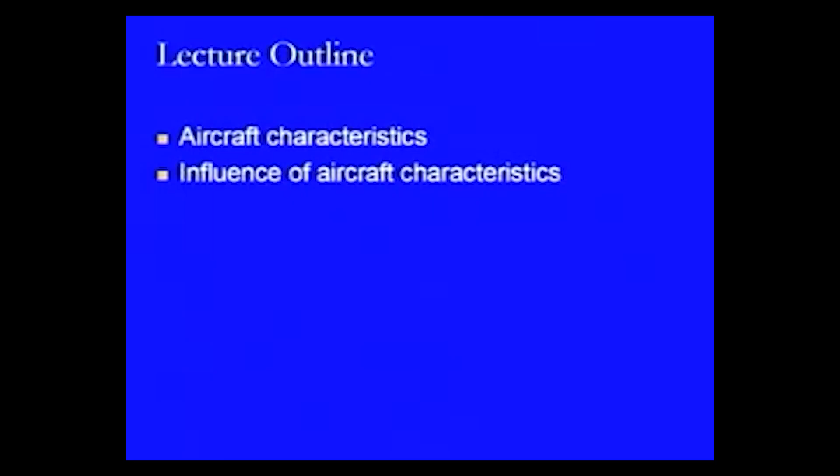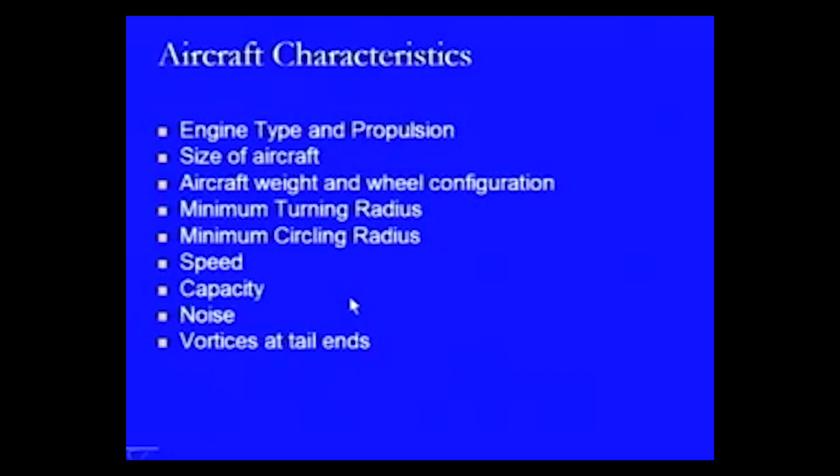So now we start with the main thing, the aircraft characteristics. Within these we will be looking at the various types of characteristics like engine type and propulsion, size of aircraft, aircraft weight, wheel configuration, minimum turning radius, minimum circling radius, speed, capacity, noise, vortices at tail ends, jet blast, and fuel spillage. These are the various characteristics which need to be considered as far as different design aspects of runways, terminals, taxiways, aprons, or maintenance units are concerned.

If we have an idea of what the characteristic is and how it creates an effect, then we can design those facilities. So in this lecture we are going to discuss at the end the different effects of these aircraft characteristics, and those effects are related to the design features which ultimately have to be designed in any airport.

Those design features we will be discussing in different lectures which come after this one. So we will see that whatever we study today has its implication in the coming design aspects. You may be a little careful to look at what characteristic is going to create an effect at what level or for what particular design.

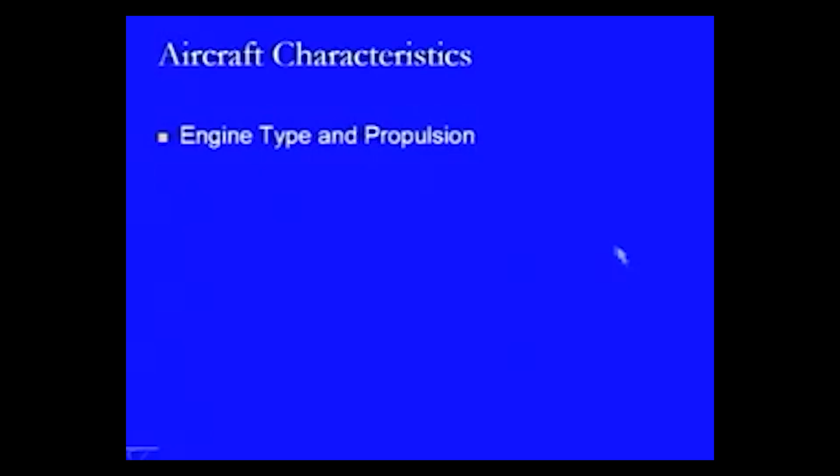In the aircraft characteristics, we will start with the first type, that is engine type and propulsion. In this, we have to look at what are the various types of engines available which can be used to provide the movement of the aircraft, and what type of movement can be provided - how fast or how slow, at what particular altitude, whether it is an atmospheric propulsion system or a transatmospheric propulsion system.

This propulsion may be through any type of engine. We have different types of engines which can be used for providing the propulsion we are interested in. There is a piston engine, a jet engine - where within the jet engine there are different types: turbojet, turbo propulsion, or ramjet - and then there is a rocket engine. All these types of engines, from their name itself, suggest how they can be used.

The piston engine, as can be seen as far as highways or railways are concerned, is the most conventional type of engine which has been used, where they are dependent on the movement of a piston. With the movement of the piston, the amount of torque and power is generated, and that torque and power is utilized by the vehicle for its movement. So that is more of a conventional type of engine which uses fuel, and that fuel is utilized to convert it into mechanical or electrical energy.

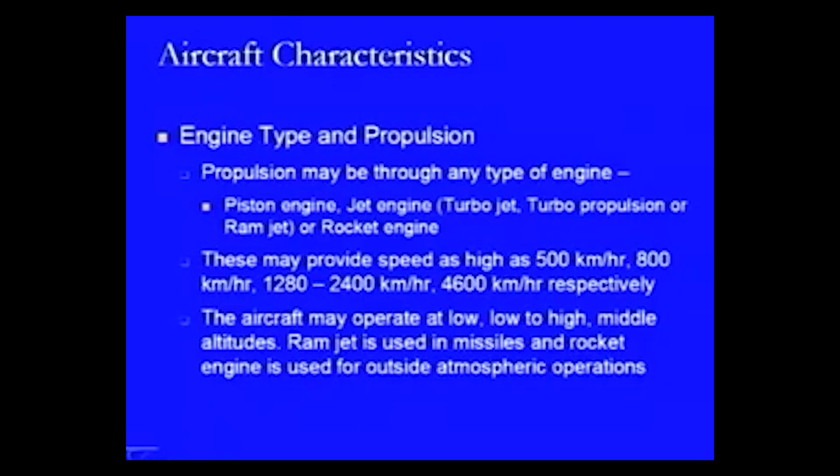They can be operated at low altitudes, low to high altitudes, or middle altitudes. Generally, piston engines can be operated at low altitudes, whereas turbojet or turboprop engines can vary between low to high altitudes. Ramjets operate around the middle altitudes. That is the way we use them.

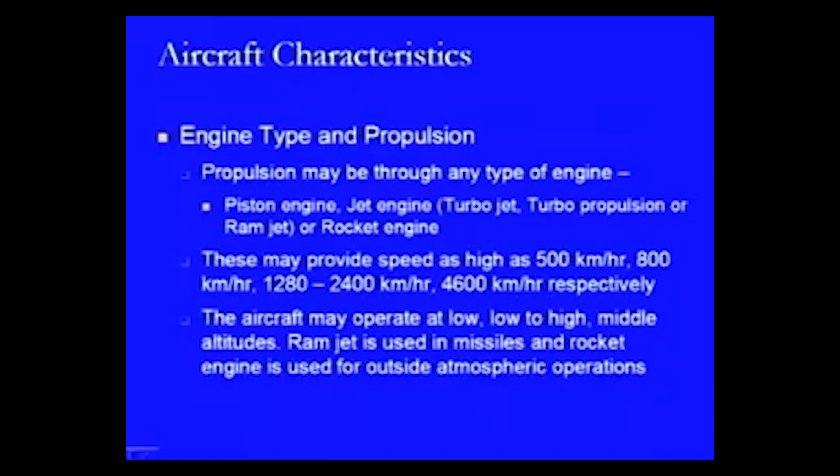Ramjets are also used in missiles, and rocket engines are used for outside atmospheric operations, because ramjets, as we see, have a higher speed and can be utilized at middle altitudes, where there are fewer chances of other operating systems being used, especially aircrafts which will be moving at low or high altitudes. Most of the time in new technology conditions, the high altitude conditions and middle altitude conditions can be used for the operation of missiles, and that is where ramjets are being used.

Then another thing is the size of the aircraft. This size of the aircraft is one of the important things to be looked at, in the sense that there are three components which create an effect in most cases of vehicles: its length, its height, and its width.

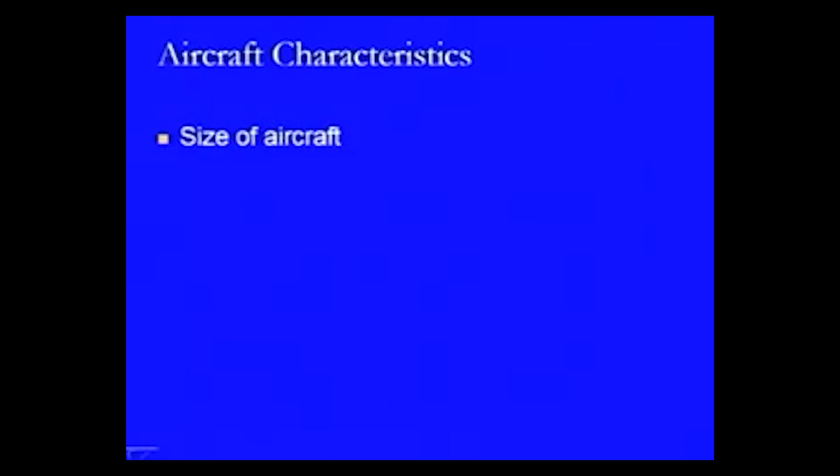Now, in the case of an aircraft, it is not just the single main body of the vehicle that we are talking about. We also have to look at the wings coming out of the main body, and that is where the overall wing span becomes important. As we have seen in the guidelines provided by ICAO or FAA, they speak not of the size of the main body of the aircraft, but of the wing span while classifying airports. That is the importance of the wings of the aircraft, and that is where the size of the aircraft at times has to be defined in terms of the wing span.

So we have to look at what defines the overall size of the aircraft, and this is defined using certain basic parameters like the fuselage length. The fuselage is the area which encompasses the fuel that is transported along the aircraft, used along the path. At the same time, it also encompasses the payload, that is the passengers and the freight, which will also be placed within the fuselage length. This is the length provided from the nose of the aircraft to the tail of the aircraft.

So, that is the overall length of the fuselage. Then another thing is the gear tread, which is the distance between the main gears being provided.

Height is usually taken at the tail, because in the case of the tail we provide a sort of wing in the vertical direction, and due to that the height increases beyond the topmost level of the fuselage at the nose. Therefore, the height of the aircraft is taken at the tail.

Then the width of the tail is to be examined and computed, because apart from the main fuselage body at the tail, there are two small wings provided at the back. So the overall width of the tail, which encompasses the fuselage plus the wings, has to be considered.

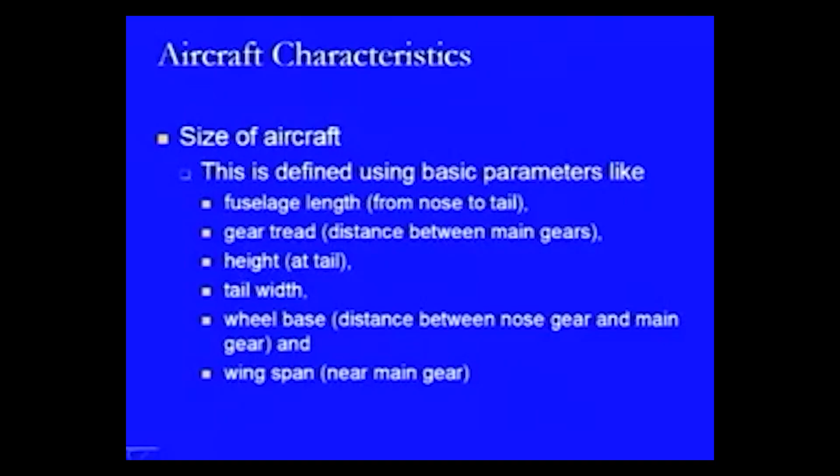The next important parameter defining the size of the aircraft is the wing span. This is calculated near the main gears, where the two wings on the sides connect with the fuselage, and if we go along these wings to the farthest point on one side to the farthest point on the other side, that is the wing span.

So this is how the size of an aircraft is defined using fuselage length, gear tread, height, tail width, wing span, and wheel base.

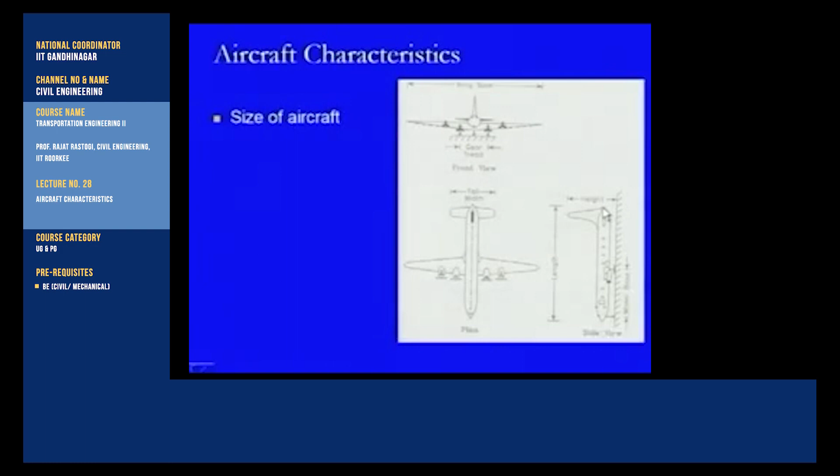At this location, just below, this body is the fuselage. So this is the nose and this is the tail, and at this location we have the wings. These wings come out on this side, as well as on the other side, and that is how the symmetrical design of the vehicle is achieved.

Now, where these wings connect with the fuselage body, whatever gears and wheels are provided there are the main gears, provided at the connectivity of the wing with the fuselage. This is for the nose one, and these are basically the wing gear systems.

Here they have shown below the four propulsion systems or engines employed on this aircraft. This is the location of one engine, this is another, and similarly there are two engines on this wing. The engines are not provided within the main body of the aircraft, they are located on the wings. Whatever number of engines have to be provided, they should be located symmetrically, and in case there is only a single engine, it has to be placed somewhere here, but generally it is not a single engine condition.

We have the double engine condition, and in that case on either of the wings one of the engines will be placed. Similarly, when it is a 4 engine condition, then we have 2 engines on one wing and 2 engines on the other wing. If it is 3, then there is one engine to be provided in the nose area. So, that is how we try to achieve the symmetrical conditions of the engine, so that the thrust or the torque or the power which is being generated by these engines is distributed evenly through all of the body

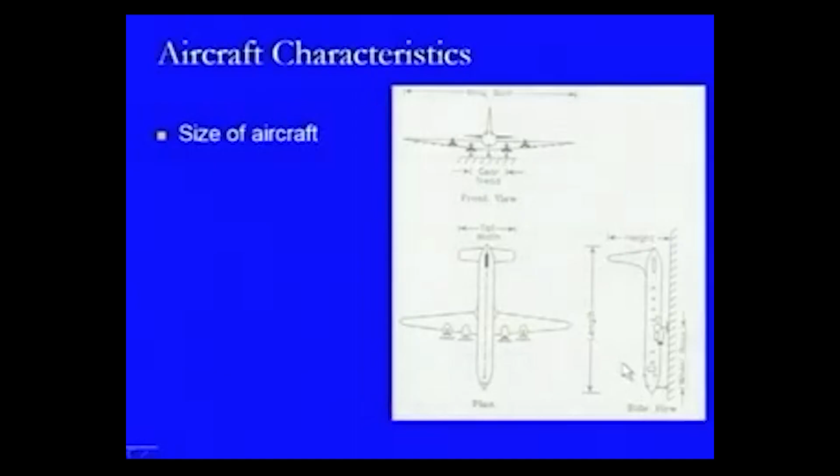So, these are the things, and along with this one, there is a wheel base. As we have discussed, the wheel base is the distance between the main gear which is located here and the nose gear which is located here. So, this distance is the wheel base, that is with respect to this wheel, the nose will be moving at a radius of this much. So, this will be taking a turn like this or like this. So, this is why it is termed as wheel base.

Now, we come to another important parameter of an aircraft, that is aircraft weight and wheel configuration. What is the total amount of weight of an aircraft? That is an important aspect. At the same time, how this load is going to be transferred to the pavement at the bottom is going to be defined by the wheel configuration and the number of wheels being provided. So, what number of wheels are provided and how they are provided is the wheel configuration.

So, in the case of the aircraft weight, there are different types of weights which we can discuss. They are defined as the maximum gross takeoff weight, the maximum structural landing weight, the operating empty weight, the payload and zero fuel weight. So, these are the 5 categories of the weights, and here they have been designated as A, B, C, D and E, so as to define the correlation between all these types of weights, which we will be looking at in a diagrammatic form.

But what basically are this maximum gross takeoff weight and others? In the case of the maximum gross takeoff weight, this is the total amount of weight which can be taken by an aircraft at the time when it is taking off from the runway strip to the air. So, at that point of time, whatever is the weight of an aircraft, that weight is termed as takeoff weight.

Payload means it is a load which is being paid for and from where the revenues have been generated. So, that is the payload; it includes the passengers and it includes the freight. Then there is a zero fuel weight. That zero fuel weight is a condition when the aircraft is reaching the destination and the fuel is coming to the zero level. So, at that point of time, whatever the weight is, that is the zero fuel condition weight.

And then operating empty weight means we are operating without taking any other load, that is, the payload is not there; that is the empty operating weight. And we will look at how they change. And another one is this maximum structural landing weight.

As we have seen in the case of the takeoff weight, it incorporates all the types of weights which can be there, like the weight of the aircraft, weight of the payload, weight of the fuel, weight of the accessories being provided for the passengers or for the freight; everything is included. Whereas when we talk about the landing weight, when we are landing there will be passengers, there will be freight, there will be the weight of the aircraft itself, but what is deducted from the takeoff weight is the weight of the fuel consumed during the journey. So, whatever fuel is consumed during the journey, that much weight will get reduced, and that will become the maximum structural landing weight.

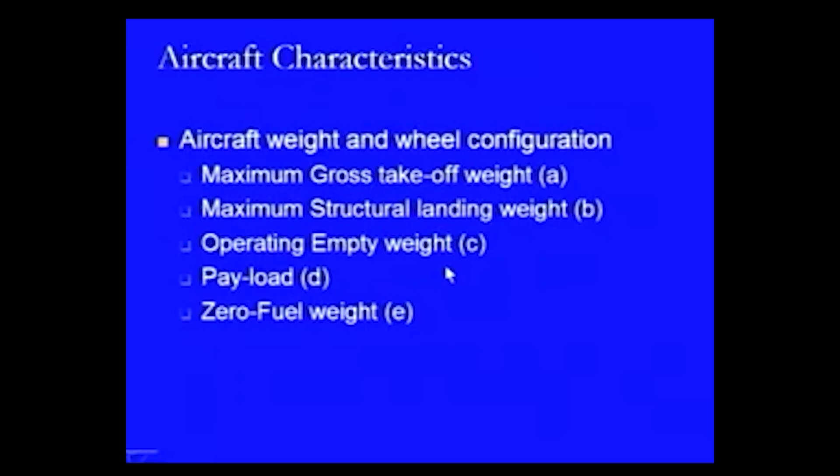Now, the word maximum comes depending on the size of the aircraft which will be using that airport. So, on that basis, whatever is the biggest aircraft which will be using the airport, we will take the gross takeoff weight and the structural landing weight with respect to that aircraft. That is an important aspect, because some of the supporting system designs are dependent on these types of weights.

Here in this diagram, we are trying to show the relationship of all these components. As we have discussed, we have A, B, C, D and E. If we look at C, D and E, C is operating empty weight, D is payload and E is zero fuel weight. So, here this C is the empty operating weight. This empty operating weight varies between 44% and 66% of the overall weight of an aircraft. So, it comes up to this point. If we assume this as a 100% scale, then it will be up to this level.

Then we have this D, which is the payload. This payload varies between 16 and 24% in a normal aircraft, where we are talking about the passengers and the freight. Then we have this zero fuel weight, and this zero fuel weight varies between 6% and 40% depending on the size of the aircraft and the distance for which the aircraft is making a flight. Then there is also some reserve fuel, which is a very small value of 4 to 6%. That is what is shown here at this level. So, these are the different components of the weights.

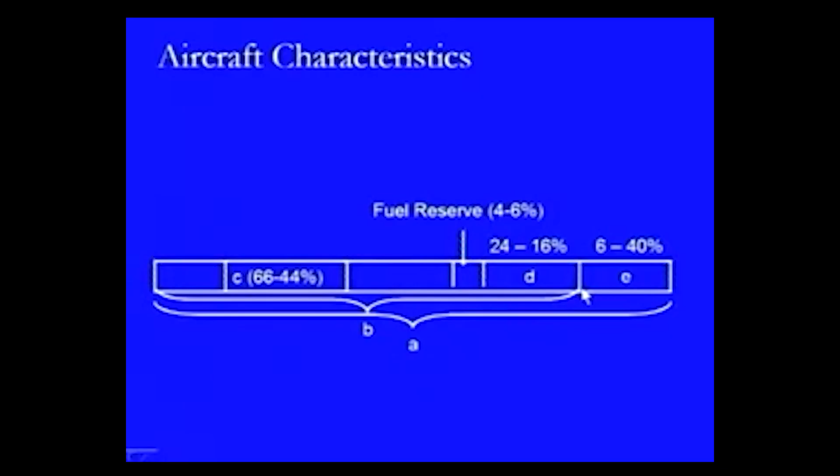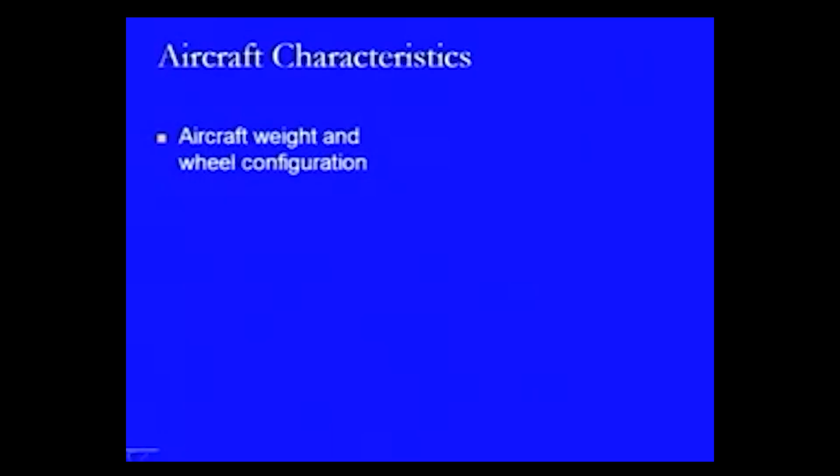And if we remove the weight of the fuel consumed during the journey, then what we are left with is B, and this B is nothing but the structural landing weight with which the aircraft will be landing on any airport. So, these are the weight characteristics of the aircraft, and now we will look at the wheel configurations. Wheel configurations, as I have told, define how the loads are going to be transferred to the bottom supporting system.

The more the wheels, the less is going to be the stress at a certain location, and that is where we require a lesser thickness of the material at the bottom, or we can have a material which can take a lesser amount of loads. So, that is where the wheel configuration becomes important, and there are different types of wheel configurations available. It all depends upon the size of the aircraft, and on the basis of that size we can provide the various types of wheel configurations.

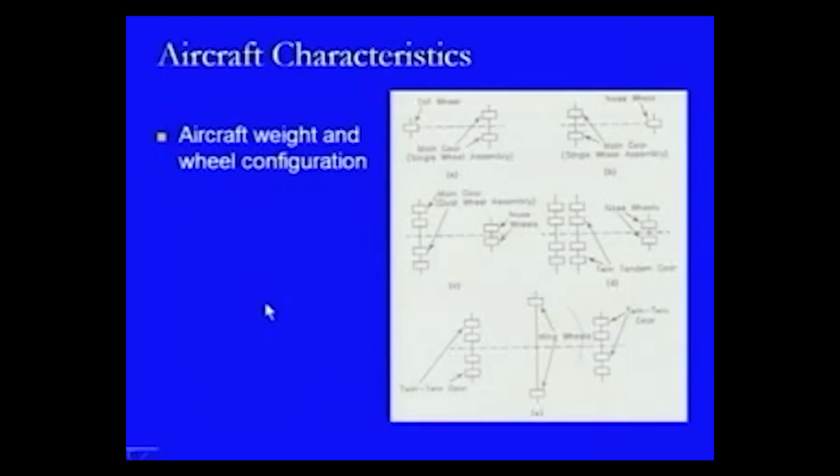And then there is a twin gear system, where we are providing the twin gears at the back at the wing wheels, and again we have the gears provided in the nose area. So, in the nose as well as in the tail area we have wheels, and at the main gear location also we have wheels. So, these are the different configurations of the wheels which can be there.

Now, we come to another important characteristic, that is the minimum turning radius. This minimum turning radius is defined as follows: while taking a turn, the nose gear is steered. As we have seen in the case of road vehicles, if we steer the vehicle, the front wheel is steered, and the back wheel is generally the powered wheel, from where the power comes to the vehicle. The same condition is here.

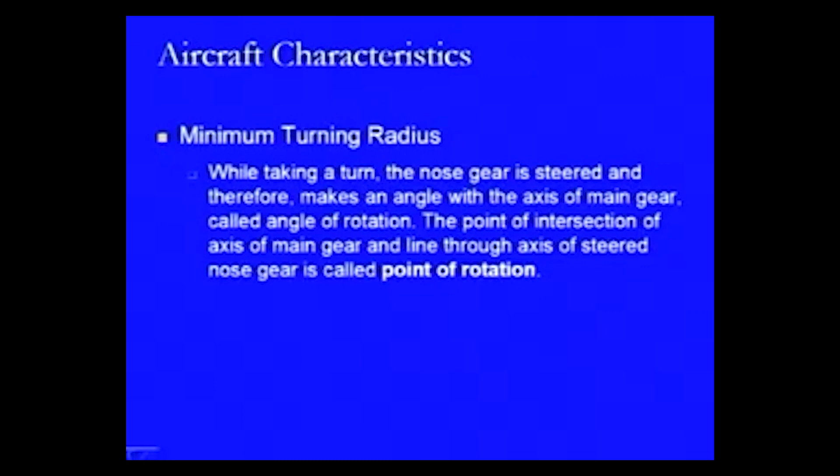Here the nose gear is steered while taking a turn, and therefore it makes an angle with the axis of the main gear, because the main gears are provided at the wing location. So, as soon as it is steering, there will be an angle with respect to the axis of the main gear, and this angle is known as the angle of rotation. And the point of intersection of the axis of the main gear and the line through the axis of the steered nose gear is called the point of rotation. That is the point with respect to which the whole aircraft will take a turn.

That point of rotation is identified on the basis of the extension of the axis of the main gear as well as of the steered nose gear. Wherever these two extended axes intersect, that point is termed the point of rotation. The maximum angle of rotation varies between 50° and 60°, and the line joining the center of rotation and the tip of the farthest wing of the aircraft is known as the minimum turning radius. This is the minimum value by which an aircraft can take a turn, and any other radius by which the aircraft takes a turn will be more than this one.

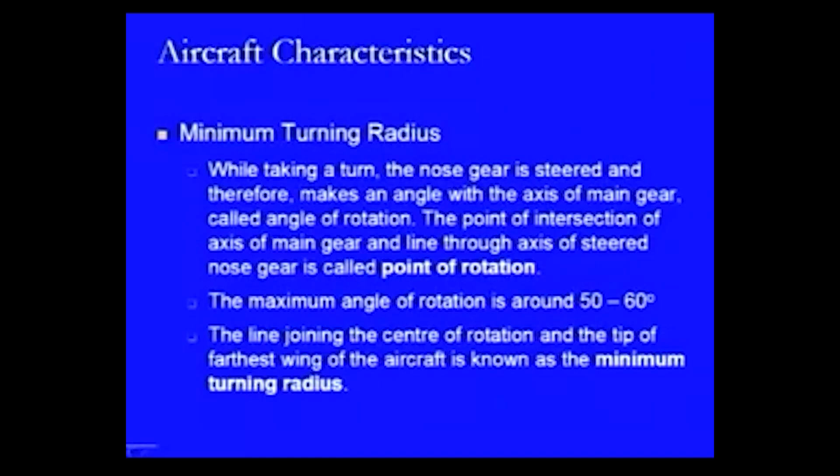So, what we have to do is, once we find the point of rotation, this point of rotation is joined with the farthest point on the wing on either side, and whichever is the maximum, that maximum value is going to be the minimum turning radius.

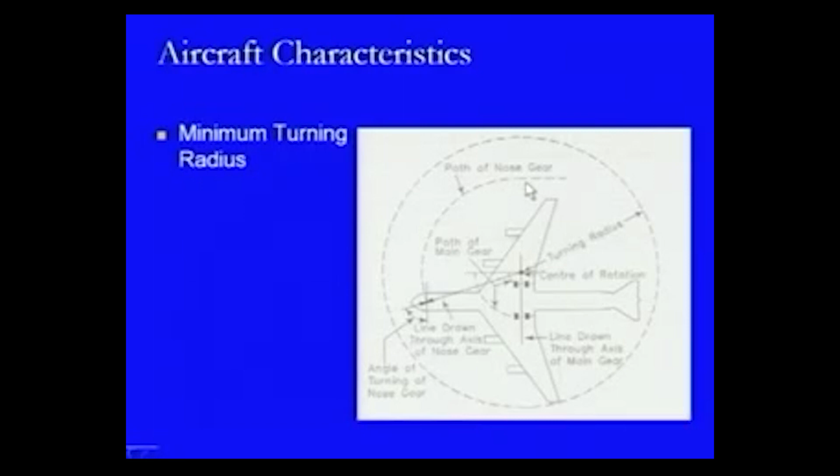So, it will be taking a turn with respect to this point and will move at this particular radius like this. So, the turning radius is equivalent to this distance. If I join this dot with this last point, that will be the turning radius. So, this is the minimum turning radius with which the aircraft will be taking a turn on any airport while it is moving on the ground. That is the ground turning radius which is to be provided, and if the aircraft is big, it requires a bigger turning radius. If the aircraft is small, it requires a smaller turning radius.

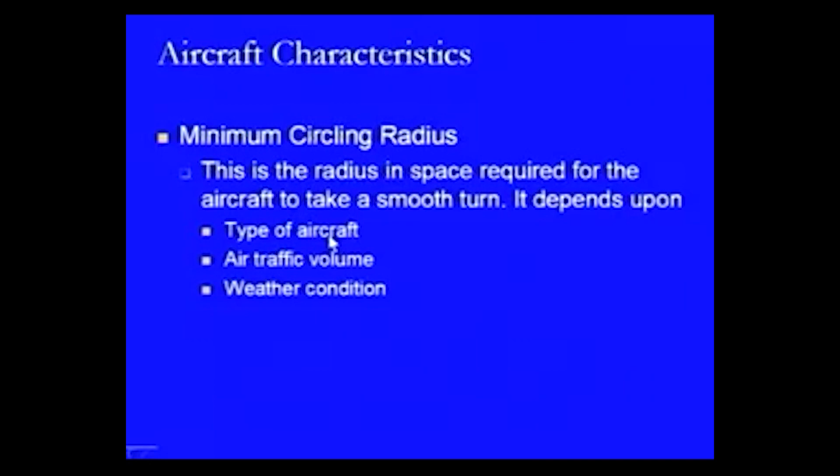In the same form, we look at another characteristic of an aircraft, that is minimum circling radius. This minimum circling radius is related to the movement of the aircraft within the air, and this is the radius in space which is required for an aircraft to take a smooth turn. Therefore, it is dependent on aspects like the type of the aircraft, meaning what type of power propulsion system is available to the aircraft, the size of the aircraft, the air traffic volume, and the weather conditions. That is going to define this minimum circling radius.

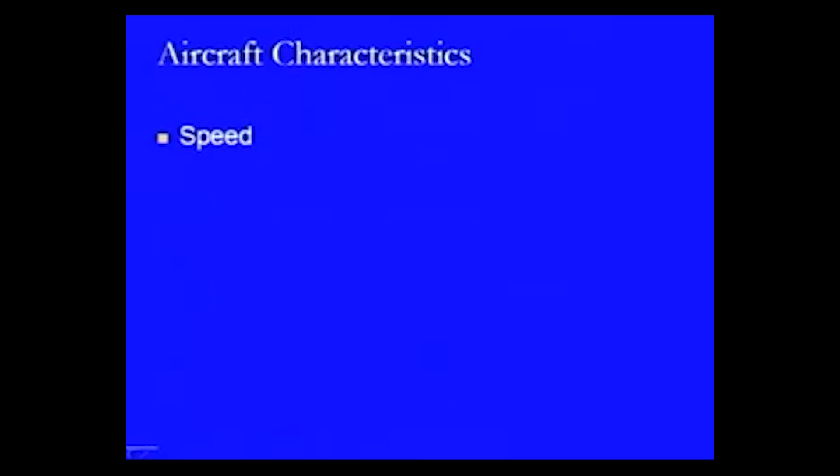And this minimum circling radius is the total radius which is provided at the top of the airport in which the aircraft will be circling if it is not being allowed to land. Sometimes you must have seen aircraft moving at the top of the airport; that is the circling radius, and its significance we will be looking at later.

Now, in the case of the speed, there are different ways the speed of an aircraft can be defined. It is like air speed, where the air speed is the speed of the aircraft relative to the medium, and in most cases the medium remains air, so far as we are talking about atmospheric movements. Within this there is an indicated speed. This indicated speed is the speed which is indicated by the instruments on board, and generally this is around 2% lower than the true speed of the aircraft.

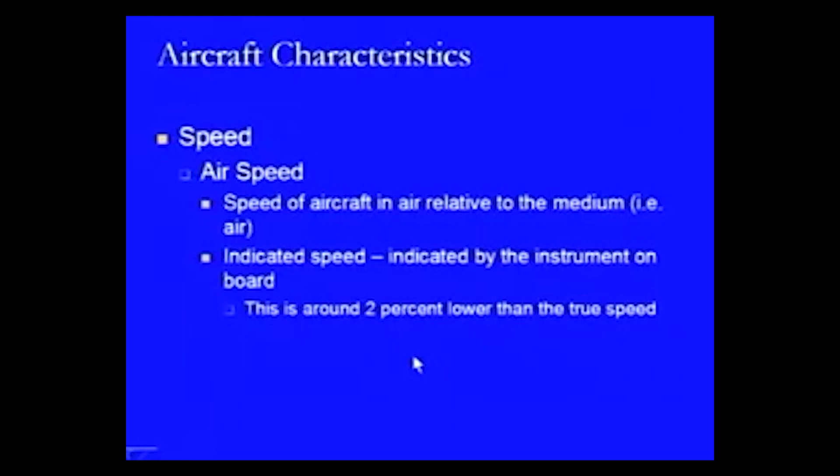The reason is that it is a relative condition, and we have to look at the effect or resistance of the air, and the effect of that is to reduce it by something like 2%. Further, in this diagram, we have the overall speed: there is a wind speed working in this direction, and the aircraft is moving in this direction. This is the medium, that is air, and the velocity of this aircraft is in this direction.

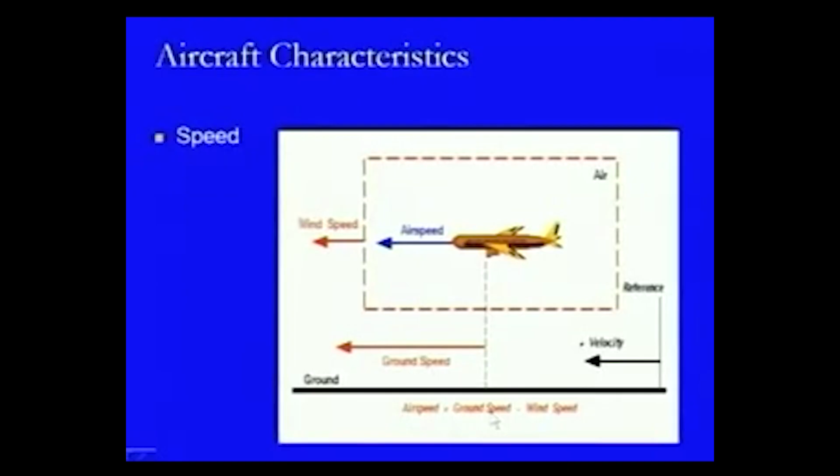So, if we are looking at the relationship between the air speed, that is the speed with which this aircraft is moving in the air, the speed termed as the ground speed, that is the speed we get while looking at this aircraft from the ground, and the correlation with the wind speed, that is the speed at which the wind is blowing, then air speed is equal to ground speed minus wind speed. So, that is how we can compute the value of the air speed, or that is the correlation. Whatever two values are given to us, we can compute the third one.

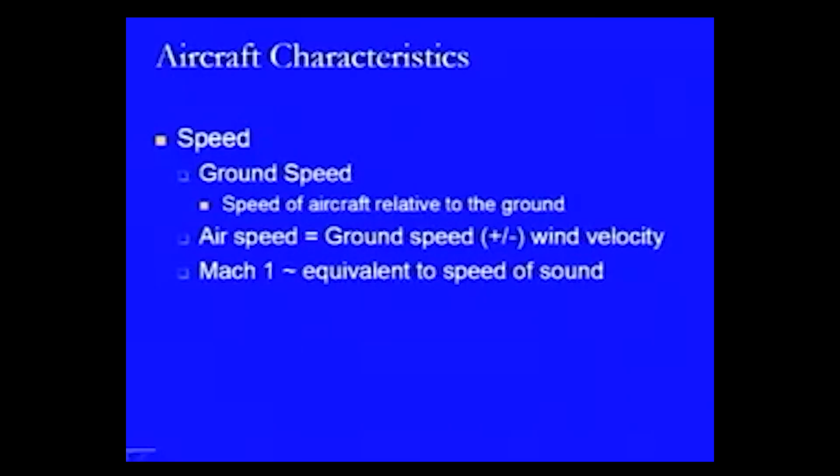So, in this case the ground speed is the speed of the aircraft relative to the ground, and the relationship we have already seen is that air speed is ground speed plus or minus wind velocity, and Mach 1 is termed as equivalent to the speed of sound. So, that is how the speeds of aircraft are termed. Generally they are termed as less than Mach 1 or more than Mach 1, and on that basis we have the subsonic and the supersonic aircraft.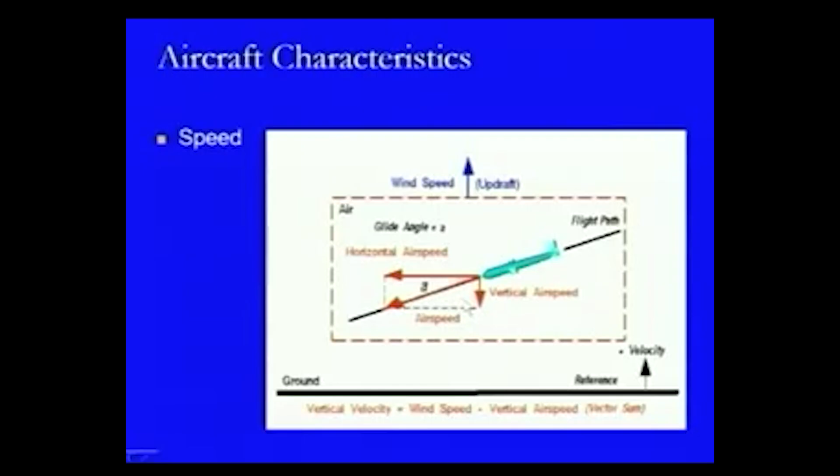And if we resolve it into two components, there will be a horizontal airspeed component and a vertical airspeed component. Okay. And in this case, if there is an updraft in the upward direction, then this vertical velocity will be equivalent to the wind speed plus vertical air speed, that is the vector sum of these values. That is another way of defining the speed in this case.

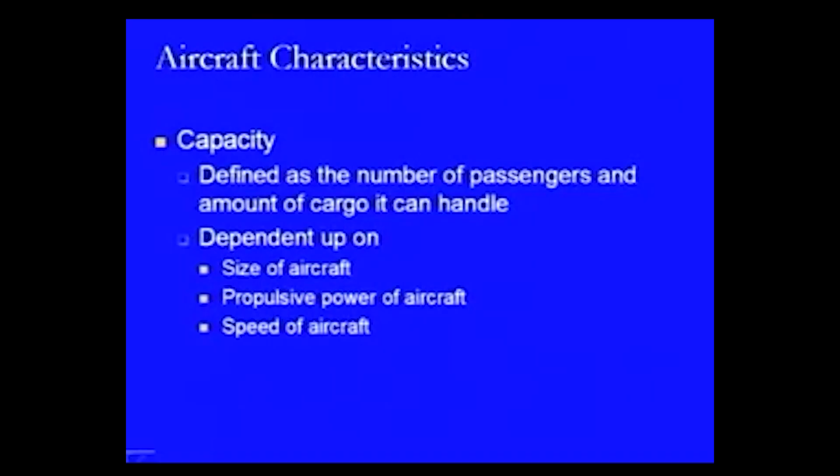Then the next characteristic is the capacity of the aircraft, and this capacity is defined in terms of the number of passengers or the total amount of freight which can be transported using that aircraft. Therefore, it is governed by certain factors, and the factors are obviously the size of the aircraft, the propulsive power available to the aircraft, and the speed of the aircraft with which things can be transported.

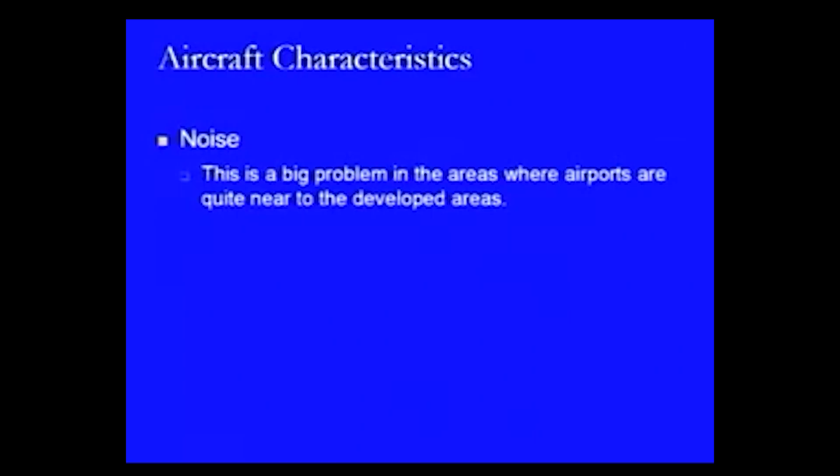Another characteristic is noise. This is one of the big problems in areas where airports are located very near to developed areas. The major sources of noise are engine noise, the machinery noise which is more prominent at the time of landing, and the primary jet noise which is more prominent at the time of takeoff. So, these are the different components of the noise. This engine noise will always remain, and the disturbances are more severe during takeoff than during landing, and that is because of the jet.

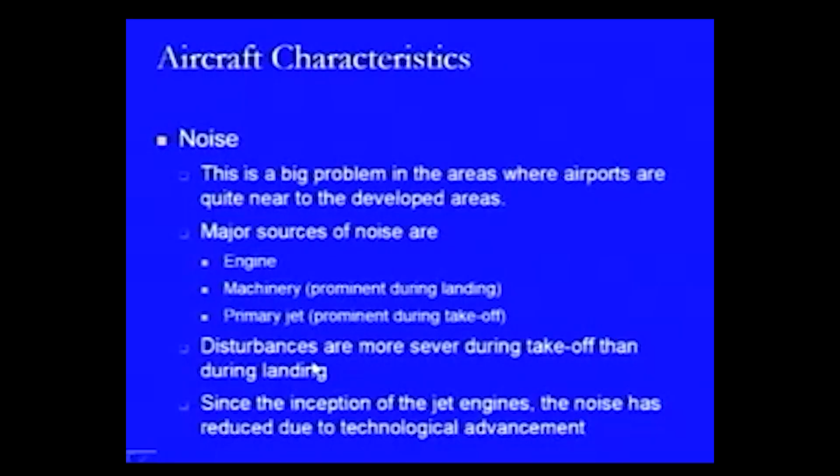Since the inception of jet engines, the noise has reduced due to technological advancement. Initially, jet noise was very heavy, and it was a deterrent to using jet engines in areas where airports are near developed areas. But now with technological advancements, this noise has been controlled to a large extent.

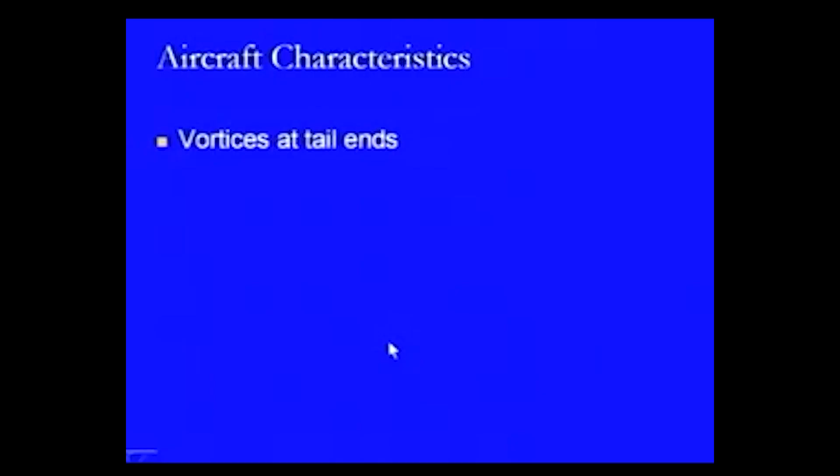Then another important aspect is the vortices which get formed at the tail while the aircraft is moving in the air at a very high speed, and these vortices have the tendency to break the tail if they are very heavy and if eddies are formed at the back. These are made of two counter-rotating cylindrical masses which extend along the flight path. So, if the measure of these counter-rotating cylindrical masses becomes large, they may become a hazardous condition for the tail end also.

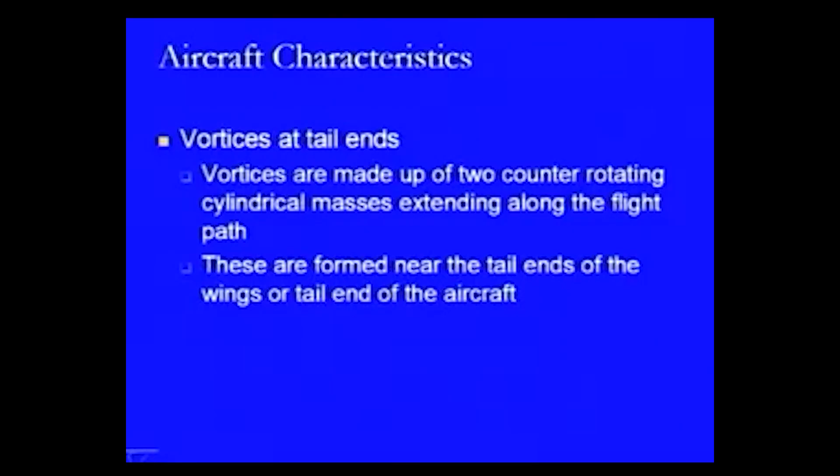And these are formed near the tail ends of the wings as well as near the tail end of the aircraft, where there is a detachment of the movement of the air with respect to the body of the aircraft.

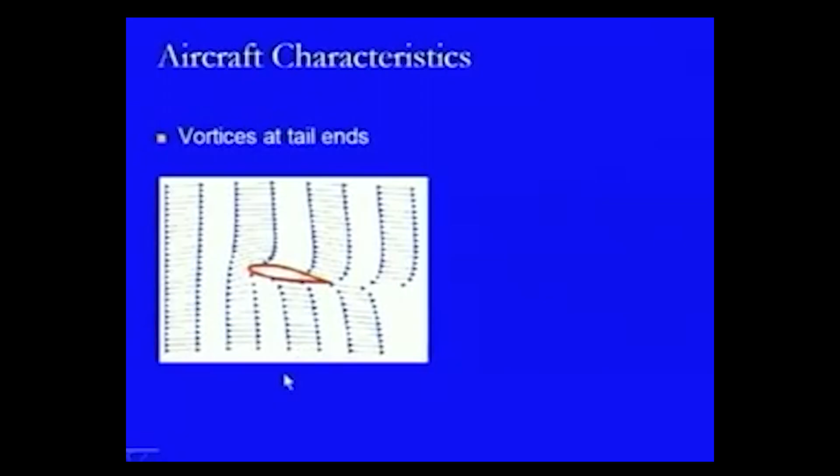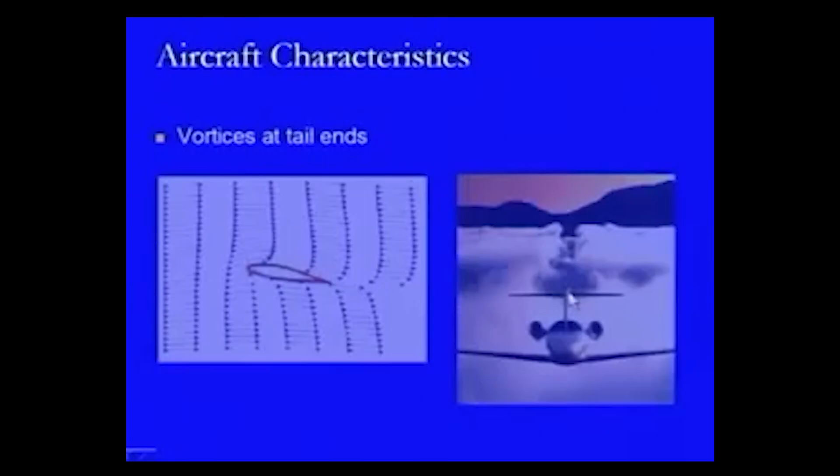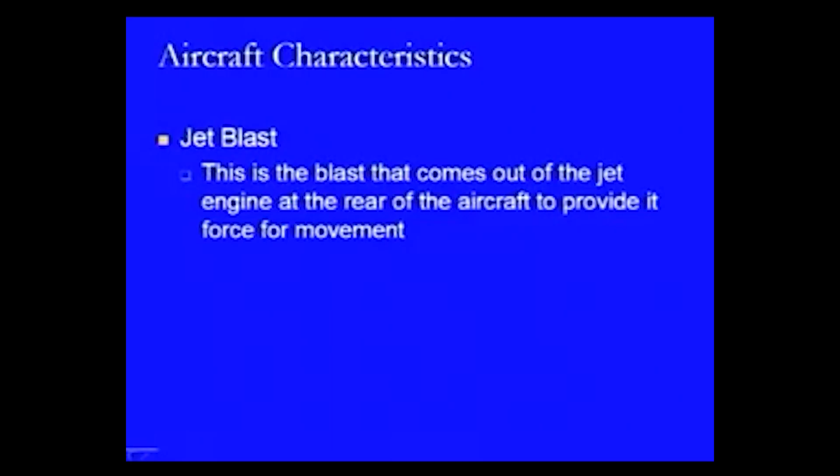Then the next aspect, in the case of aircrafts where jet blast is used, this is the blast that comes out of the jet engine at the rear of the aircraft, and it provides the force required for the movement of the aircraft. But if we consider the case where the aircraft is standing and the jet blast is coming from the rear, it is so hot that it creates a severe condition for the things on which it falls.

So the severity depends on two things: one is the height of the tailpipe from the ground, and the other is the angle of the tailpipe through which this jet blast comes out at the tail end. If it is in the upward direction, it will go up. If it is in the downward direction, it will create an effect on the pavement on which the aircraft is standing, and therefore there is a need to erect blast fences which can control the damage to the building or the pavement.

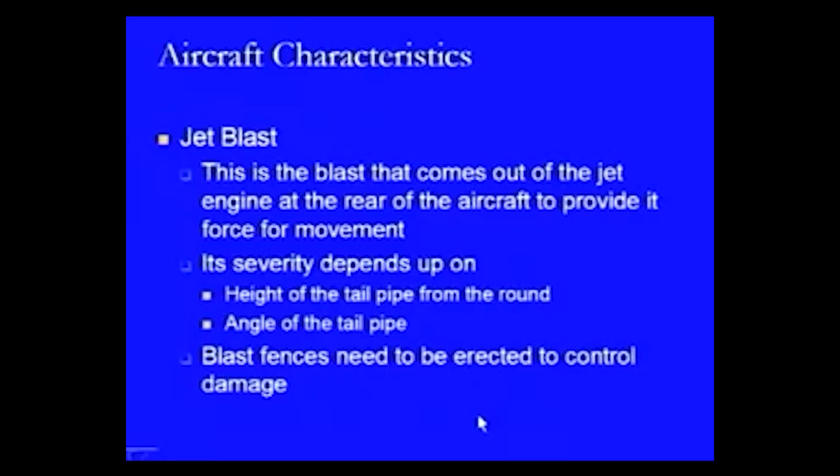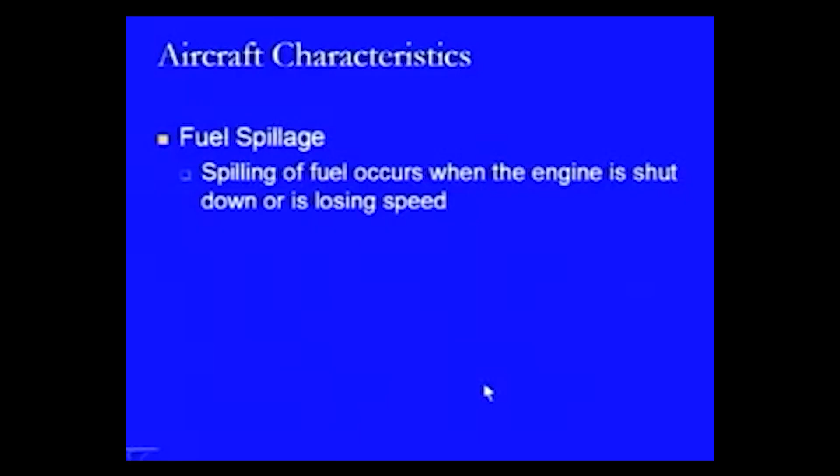Then the next one is fuel spillage. Fuel spillage is the fuel which gets spilled over the pavement from the engine or from the locations where it is being filled into the aircraft, and this creates an effect in terms of causing an effect on the speed of the aircraft while it is moving on the runways, taxiways, or apron areas.

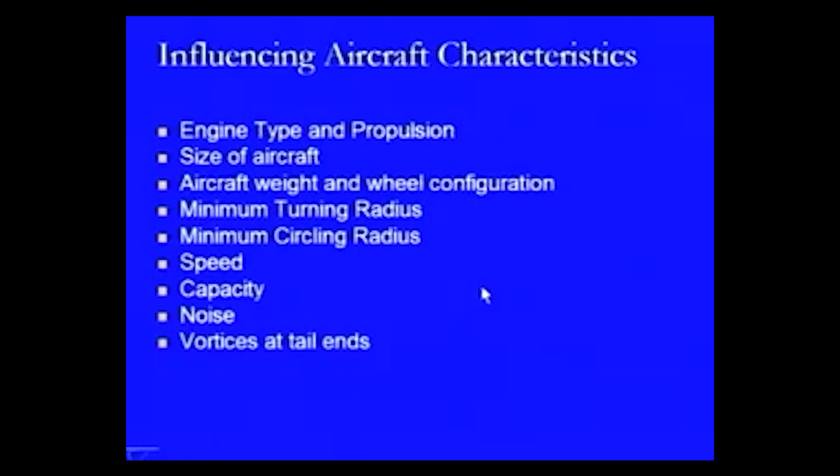Now we look at some of the influencing characteristics of aircrafts and the effect of these characteristics on the design parameters, like in the case of the very first characteristic, engine type and propulsion, or the size of the aircraft, or whatever we have discussed so far: aircraft weight and wheel configuration, minimum turning radius, minimum circling radius, speed, capacity, noise, vortices, jet blast, and fuel spillage. So we will take these up one by one.

Engine type and propulsion decides the size of the aircraft, as we discussed previously, and the speed with which the aircraft can move. Obviously this affects the length of the runway, because the more speed or more propulsion there is, the longer the runway strip required for its movement, so as to take off or to land and stop.

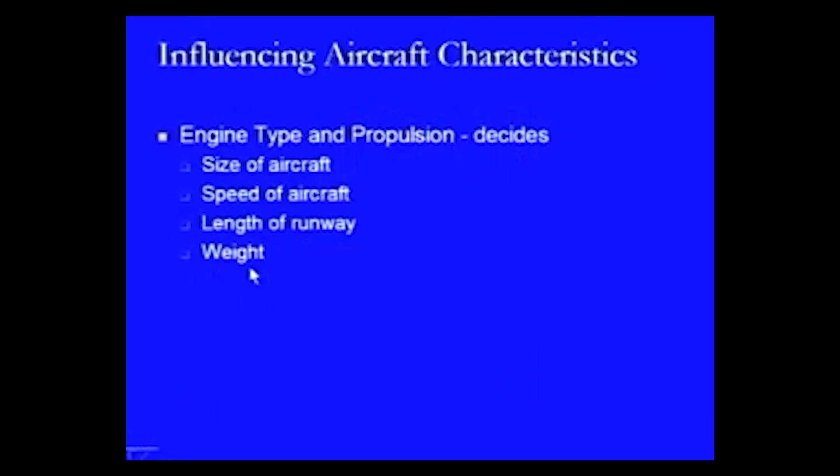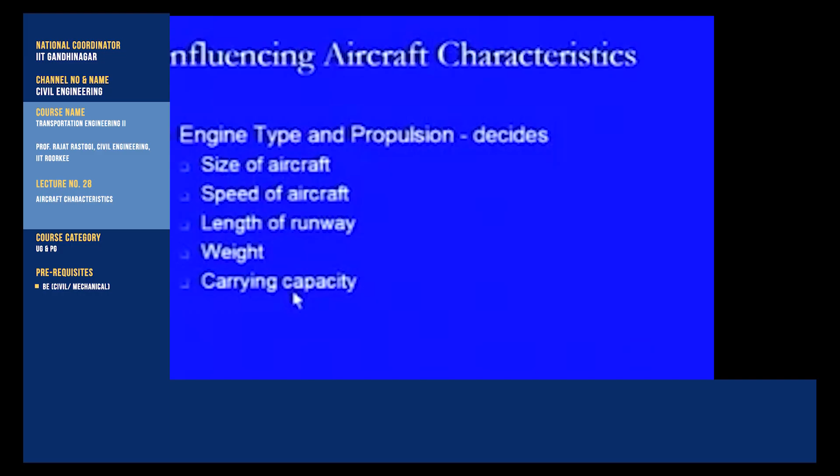It also increases the weight of the aircraft if a bigger propulsion system or a heavier engine is provided. It also creates an effect on the carrying capacity of the aircraft, since it affects the size of the aircraft. We are talking here in terms of load-taking capacity: the aircraft provided with a bigger engine or better propulsion system can take a higher load.

Noise nuisance depends on the type of propulsion system. If the propulsion system provides very heavy power, the circling radius will also increase, meaning we require a bigger area for the movement of the aircraft. At the same time, the range—the distance up to which the aircraft can move without refueling—will also be bigger if a bigger or better engine type has been used for the propulsion system.

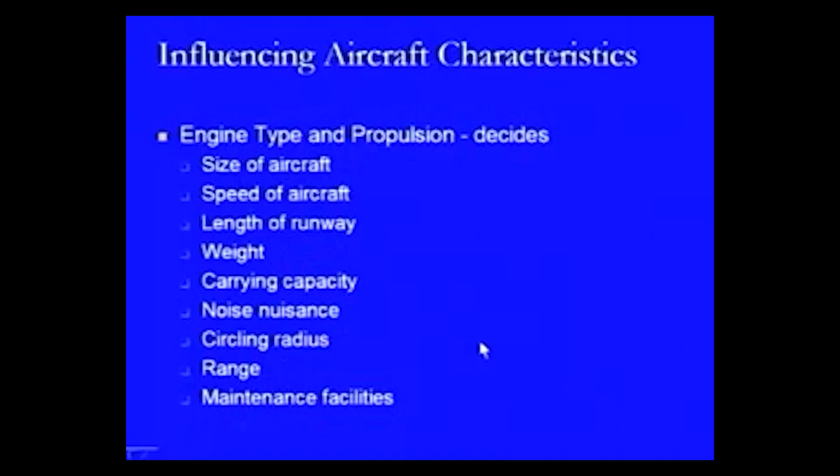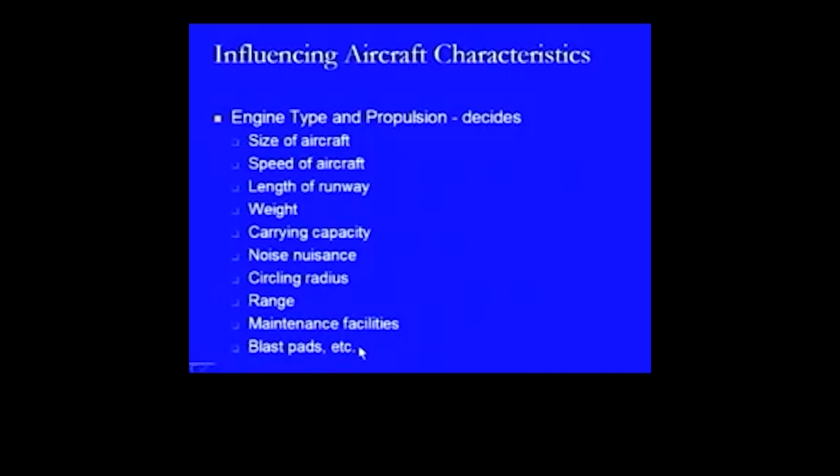Then maintenance facilities are dependent on the type of engine. That is another type of facility which is to be checked with respect to the type of aircraft coming with different types of engines. Blast pads, etc., are required in cases where jet propulsion has been used.

The size of the aircraft creates an effect in terms of load carrying capacity and facilities like the size of the apron or terminal area. Depending on whether the aircraft carries 10, 20, 100, 500 or 800 passengers, the facilities needed also increase in size. If there is a bigger aircraft, a bigger apron is to be provided. Apron means the location where the aircraft is standing, and similarly the terminal area size will also increase.

If the size of the aircraft increases, the wing span will increase, and this affects the design of the taxiway width, the separation to be provided between traffic lanes, and the size of the gates. The gates are the locations from where passengers board the aircraft, and the size of the gate is defined based on the size of the aircraft.

Similarly, the size of the apron where the aircraft is standing, and the width of the hangar gate, the location where the aircraft can be parked or maintained, known as the hangar, is governed by the size of the aircraft. Similarly, the length affects the widening of the taxiway on curves, the size of the apron, hangars, and aircraft capacity. These affect the length and width of the exit taxiway, since the width needed while taking a turn is governed by the length of the aircraft. Height also creates an effect in terms of facilities like hangars.

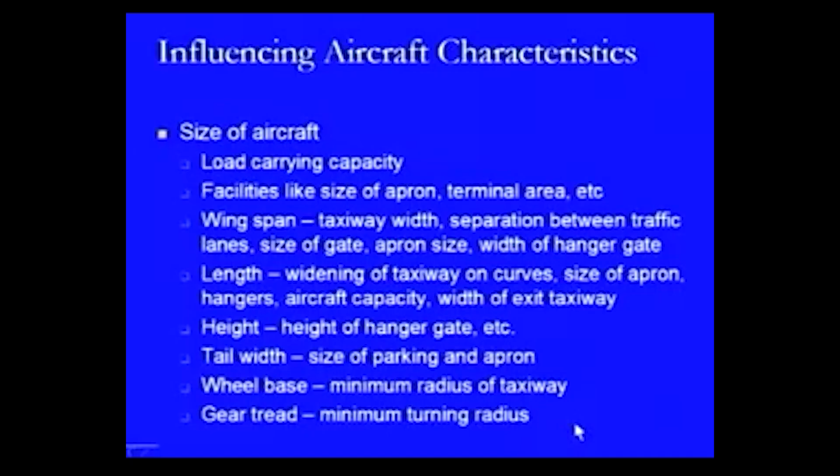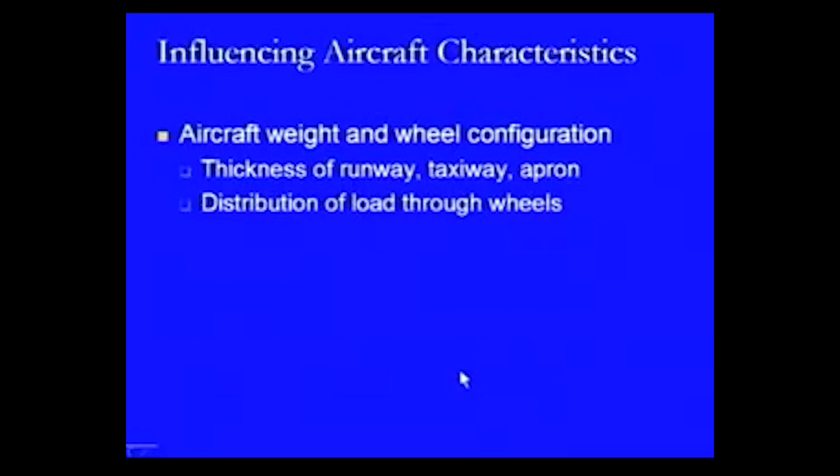The weight of the aircraft and the wheel configuration affect the thickness of the runway, taxiway, or apron pavement to be provided, what should be the thickness of that pavement, and the distribution of loads through the wheels, which we already discussed when we discussed the configuration.

The generation of revenue is also affected, because if we can carry more load, more revenue is generated. Turning is also governed by the aircraft weight; if it is heavier, turning may be a little difficult at sharper conditions. Stability is also governed by aircraft weight, and this stability may be in terms of the support system provided, or in terms of the wheel configurations needed depending on the amount of weight the aircraft carries. So two types of stability concerns can be there.

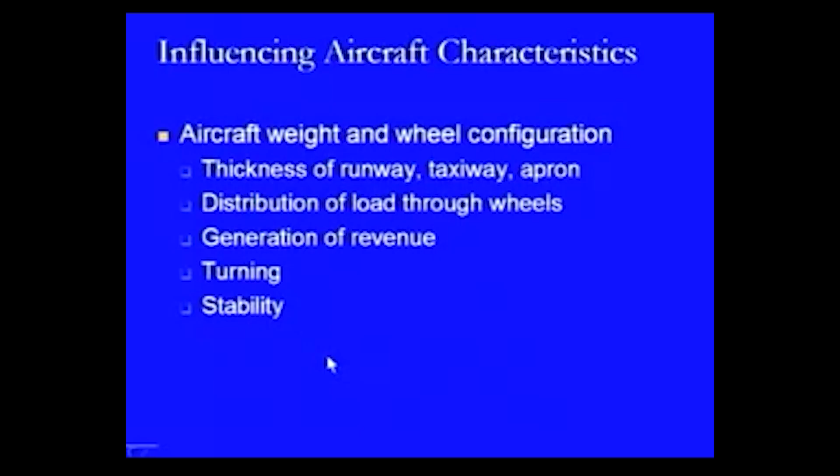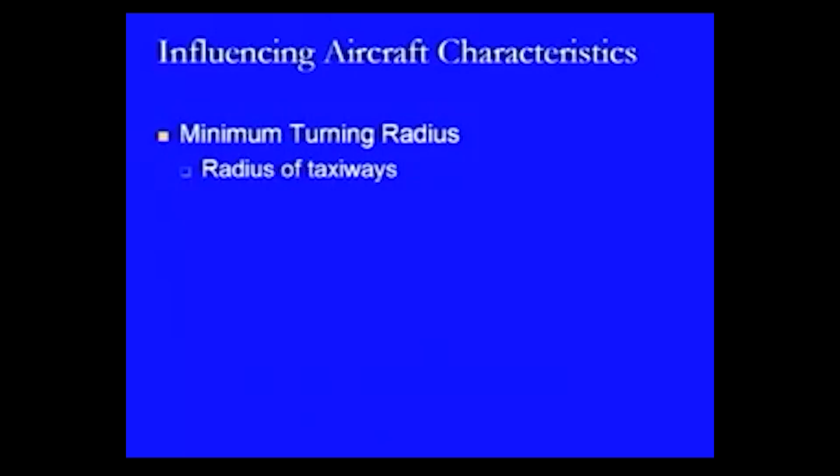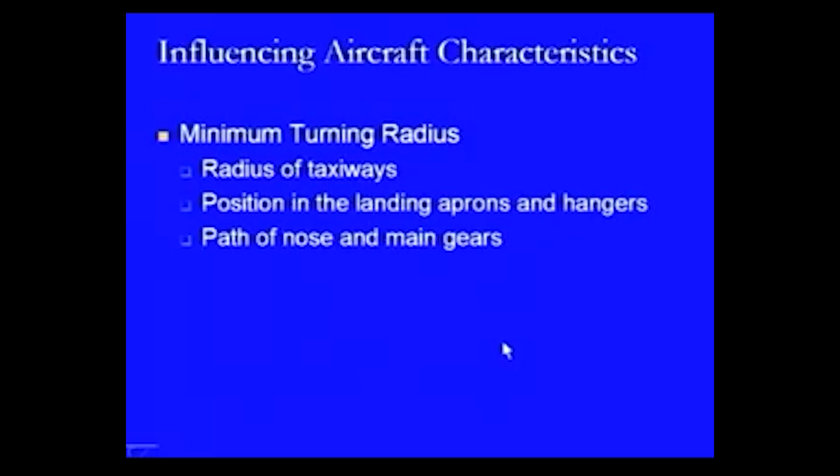Now the next aircraft characteristic is the minimum turning radius, and it has its effect on the radius of the taxiway. The taxiway is the connecting pavement provided between the runways and the aprons. The position of landing aprons and hangars is also governed by the turning radius, in terms of how they are provided within the aprons or hangars, based on the path of the nose and main gears which will be traced on the pavement while taking a turn.

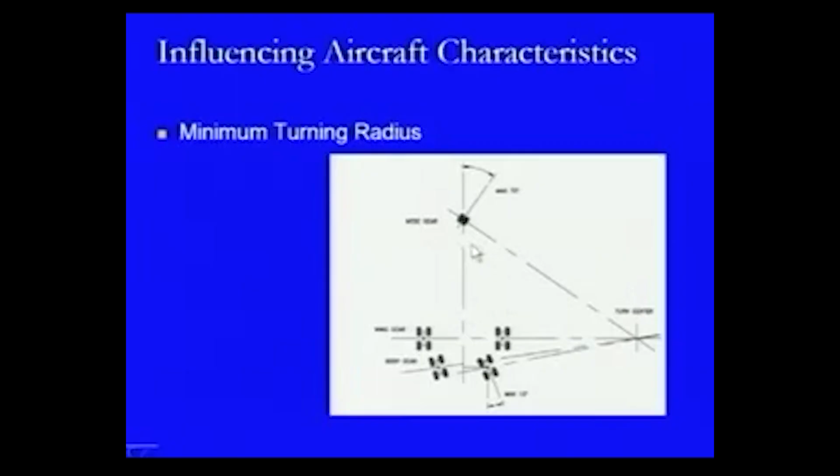Then there is a minimum turning radius, defined here with a turn center based on the main gear axis and the steering gear axis, with the point of intersection marked. Now when it is taking a turn, if it is provided with a dual gear system at the main axle, they will not follow each other exactly. So that is something we have to look at, how the turning is going to happen.

Then the minimum circling radius, because it is related with the movement of the aircraft in the air, defines basically the separation of two nearby airports, because this circling radius is a very big radius, and at times if it is related to a very big aircraft, then it may be in kilometers. So that is why it defines at what particular distance the two airports can be provided with respect to each other.

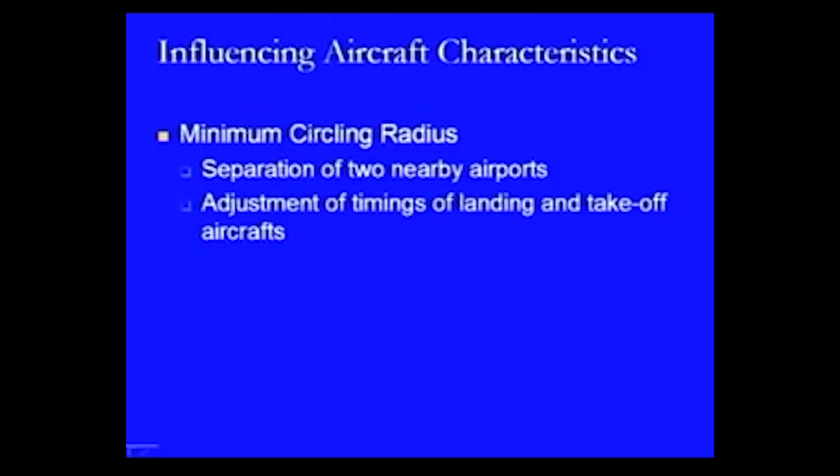Adjustment of timings of landing and takeoff aircrafts will also be dependent on the circling radius, as some aircrafts may be having this in kilometers. So if it is lesser, there can be frequent landing or takeoff, but if it is bigger, the time difference between landings or takeoffs will increase, and it will have its effect on the airport capacity, defined in terms of the number of aircrafts it can handle in one hour. So if this timing is increasing, airport capacity will be reducing, because it can handle fewer aircrafts in one hour.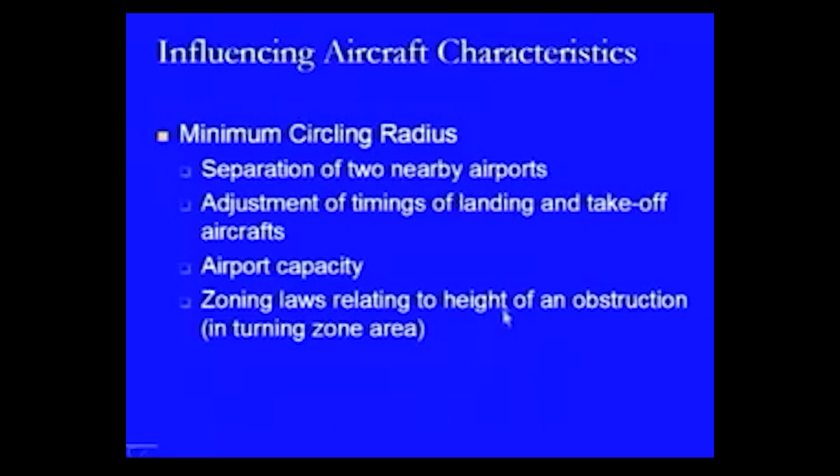Similarly, it also has its effect in terms of the zoning laws, which are related to the height of obstructions in the adjoining areas of the airport. So up to what particular height constructions or developments can be provided is also dependent on the circling radius of an aircraft. Within this range, the buildings or other constructions should not go up to a height which can create a problem for the circling radius or the aircraft.

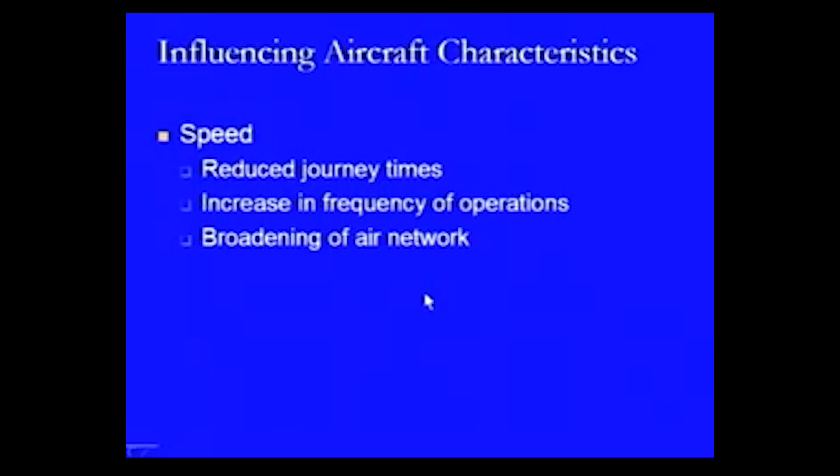Then speed obviously reduces the journey times, and it also helps in increasing the frequencies of operations, meaning there can be more operations within an hour if speeds are higher, and therefore it helps in improving and broadening the air network system. That is the effect of speed.

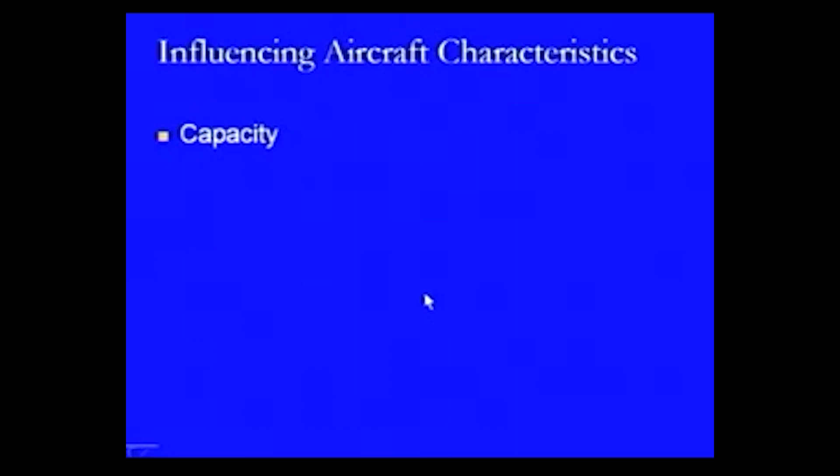But the speed is not directly creating an effect in terms of design variables; rather it has an effect in terms of the speed with which the aircraft is landing. That particular speed is used for designing facilities like taxiways or exit taxiways, that is, the location from where the aircraft will be coming from the runway to the taxiway.

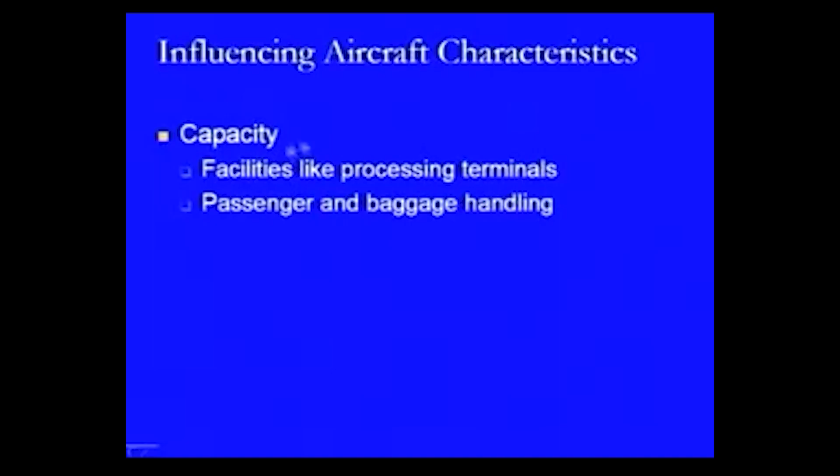Then capacity is another characteristic which creates an effect on the processing terminals, that is, what type of facilities need to be provided. It also creates an effect on the passenger and baggage handling facilities to be provided on the airport. It is dependent on the capacity of the aircraft to handle the passengers, how many passengers or cargo is coming. Cargo processing time is also related with the capacity of that aircraft.

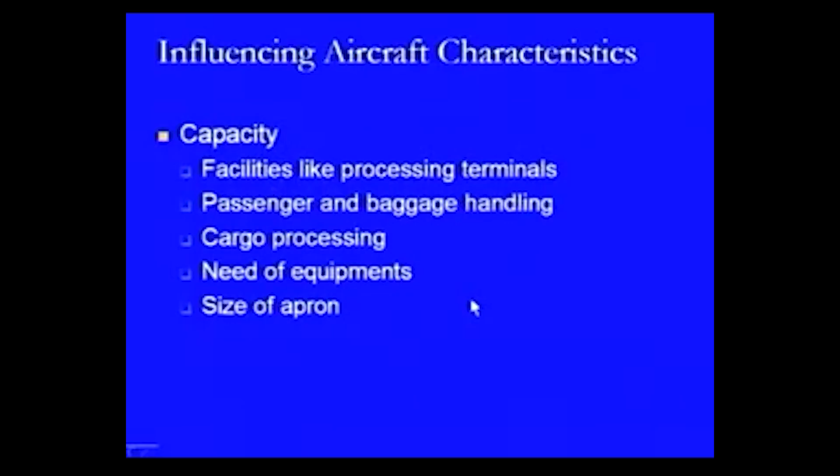The type of equipment needed, and the number of equipment needed, is also going to be dependent on the capacity. Then the size of the apron to be provided is dependent on the capacity of the aircraft, because this is directly related to the size of the aircraft.

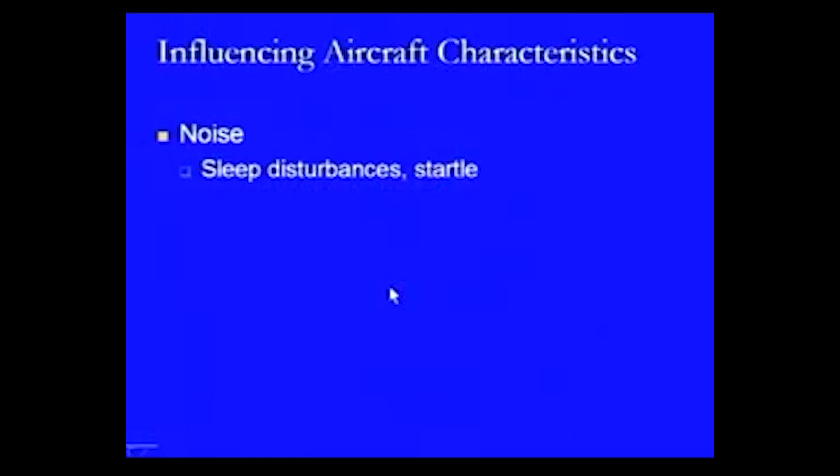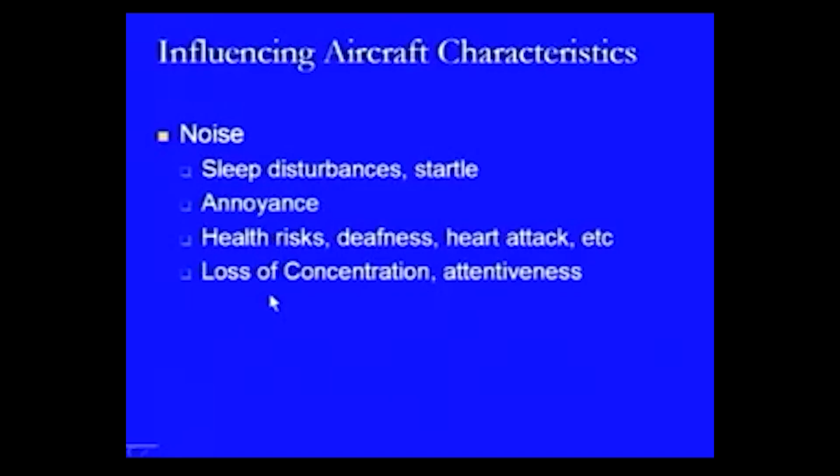The noise has its effect in terms of sleep disturbances or startle, annoyances to people, health risks like deafness or heart attacks, to people living in the adjoining areas of the airport. There can also be effects in terms of loss of concentration or attentiveness. These are general effects of noise in any location.

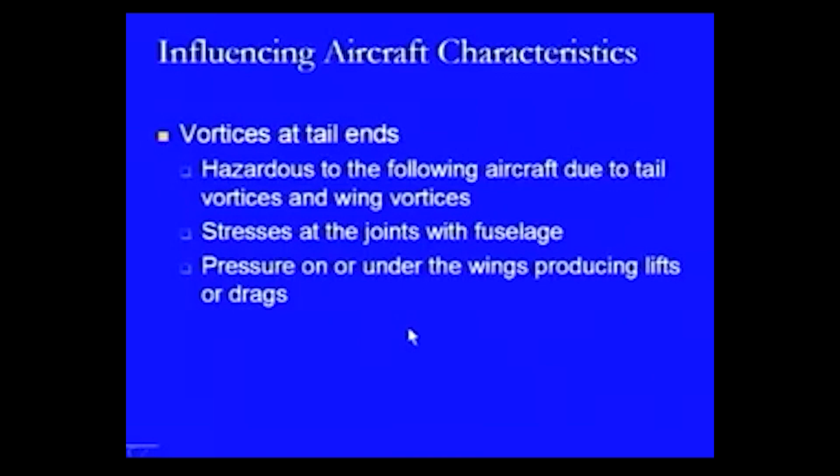Vortices at the tail ends have this effect, the wing vortices. There are stresses at the joints with the fuselage, where the problems will be, and the pressure on or under the wings producing the lift or the drag. That is another problem associated with vortices.

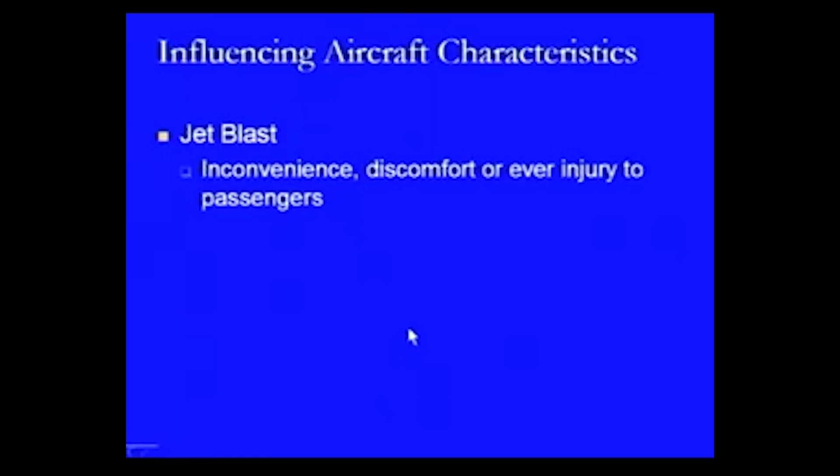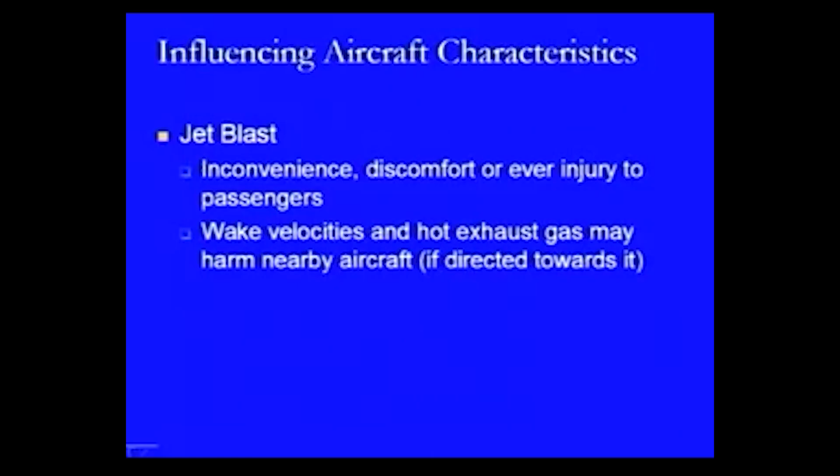Finally, in the case of jet blast, there is inconvenience or discomfort or even injury to passengers if it is not properly located, and the wake velocities and hot exhaust gas coming out at the back may harm nearby aircraft if the parking is such.

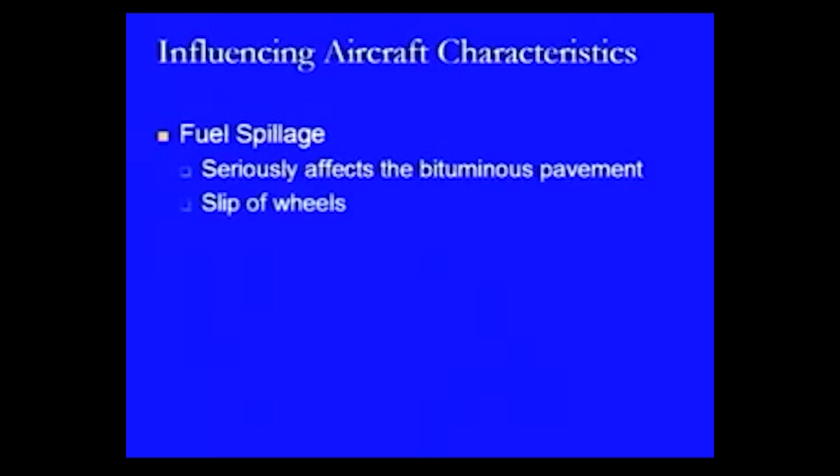Finally, there is fuel spillage which is seriously affecting the bituminous pavement, and it may cause the slipping of the wheels.

These are some of the influencing aircraft characteristics which can create an effect on the facilities being provided at any airport.

So in today's lecture, what we have basically seen is the different types of characteristics of any aircraft, though the amount may change with respect to the size or type of the aircraft, but the characteristics will remain the same. And finally, what we have tried is to see the effect of those characteristics on the design features or the facilities which need to be provided at any airport.